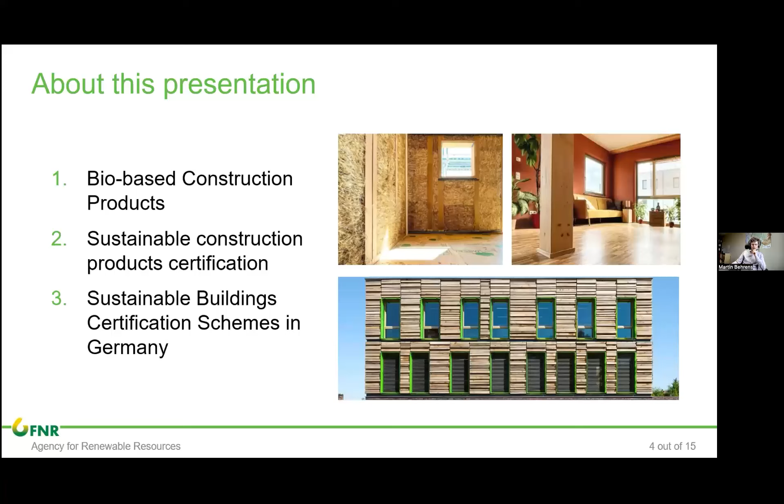Yes, when it comes to insulation materials, there are various issues quite relevant and interesting. One is circularity. Insulation materials made from renewable raw materials can often be recycled. They can be reused as new insulation materials, as raw materials for other products, and in the final step, as a raw material for pollutant-free energy generation. So actually there are no waste residues. And that's, of course, a big difference when you compare it with mineral wool, one quite common insulation material, which is still almost entirely disposed in landfills. And polystyrene is also not a good example when it comes to circularity.

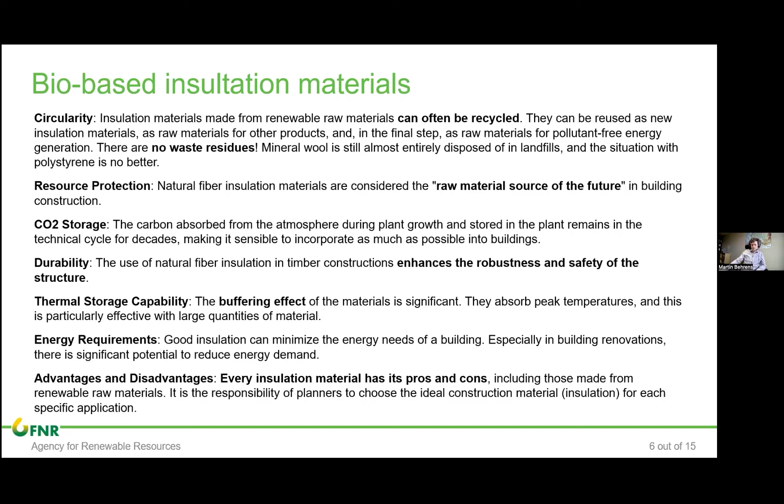Okay, just a quick overview on other materials in insulation: flax, hemp, wood fiber, sheep wool, cellulose. So there are all kinds of options. Some are more common, some are less common. And again, some advertisement to have a look at this brochure we published to learn more about this.

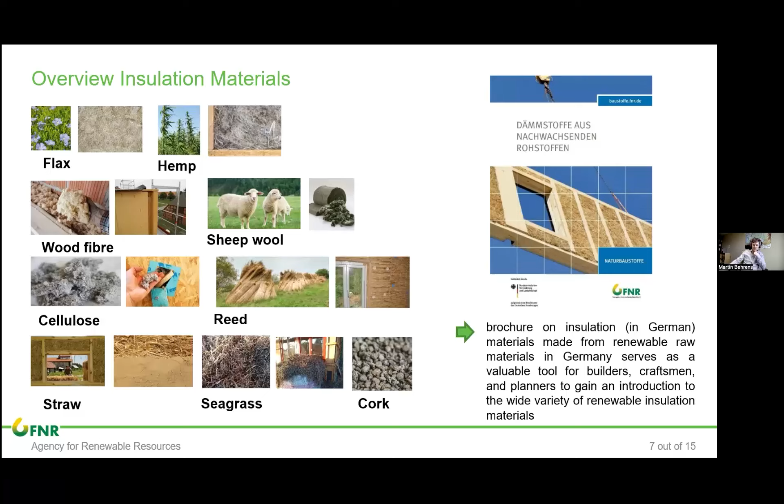Now let's look into other construction products, and I'm trying to be quick here. So we have, of course, similar issues like with the insulation materials. The thermal behavior is quite interesting, the moisture behavior. Toxic load is and can be an issue because you sometimes have very nice nature-based, bio-based materials which are then somehow mixed or "enhanced", see my hands and air quote, with toxic materials. So it's good to examine what's in your product, and even if it is bio-based, it can be harmful because some other substances are used.

The same is an issue with odor. And of course, all materials used indoors should either have a pleasant smell, and that can of course differ from person to person, or should be odor neutral.

When it comes to fire behavior, that's quite an important point and often stressed, and there are a lot of questions about this in the construction sector. The main key message is that natural building materials are often basically more predictable when it comes to fire behavior, because you don't have as many material mixes as you have with other construction products. And so you can predict the behavior in a situation of fire.

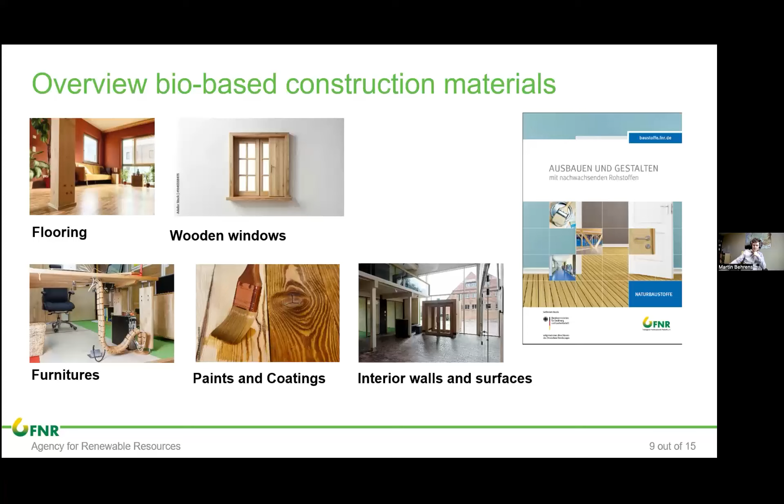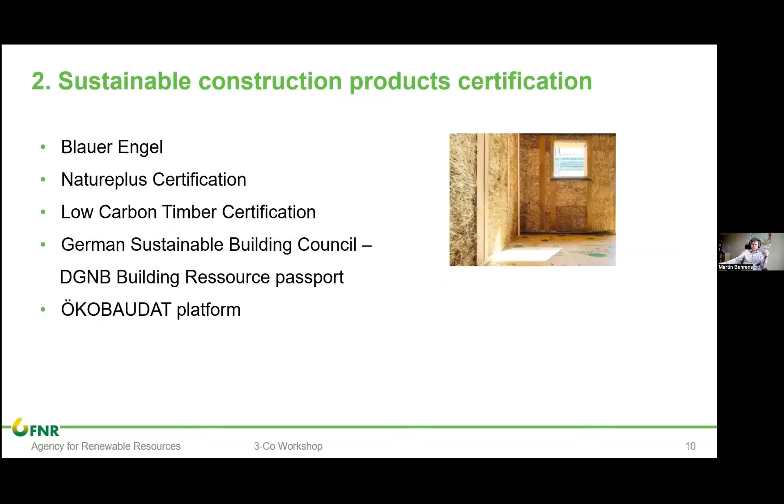Let's have a quick dive into construction product certification. A few examples here are specifically on certain product categories, and then it gets a bit wider, and you see that along the way. So of course, quite famous is the German Blue Angel. It might be small, so maybe something for you to study later.

But there are multiple different areas where you have a sustainability certification here with clear criteria. They can be used in public procurement cases if you are a public buyer. So it's really an interesting area to look into when it comes to product-specific certification.

Second is the Natureplus label, an eco-label, which is not only available in Germany, but also in other parts of Europe. It's recognized by leading certification schemes in Europe and internationally, actually. So it is also used for certification of entire building systems. And Natureplus covers criteria including climate protection, healthy living, and resource conservation. And you always have a link here, so you can dive into the details.

This one is, in Germany, Holz von hier. It's a low carbon timber certification. It is a specific scheme which focuses on the material base, timber, and it is a type 1 label. And the criteria cover the entire transport along the value chain, which is quite important because that's where you have the carbon.

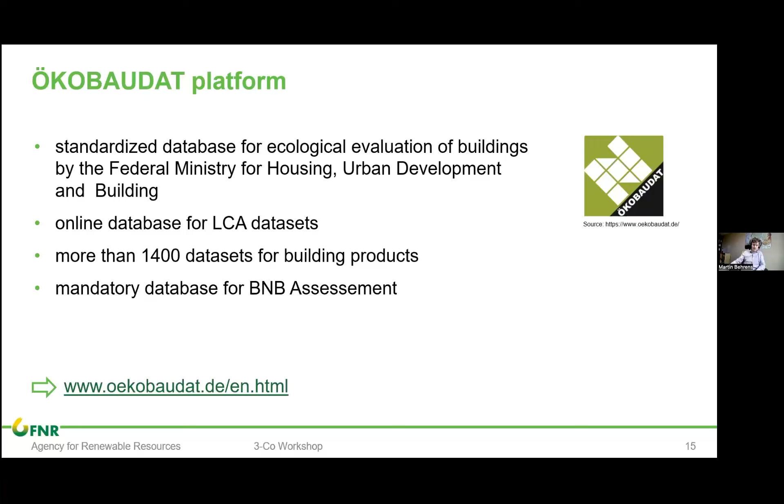All right, now let's have a look into sustainability schemes for entire buildings. So I'm focusing here on the federal support schemes, schemes which are basically backed by the German government. And why do we have that? Because there's an increasing demand for these kinds of buildings, and the need to back this up with a clear certification system backed by clear data and science. So that's what I'm going to show you now.

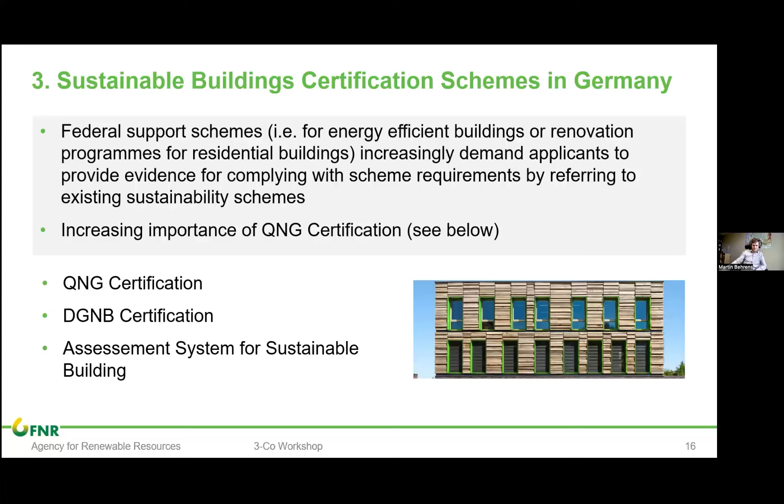So the one certification scheme is again a certification scheme organized by the Federal Ministry of Housing, Urban Development and Building.

And it is basically using existing schemes in Germany, somehow mashing them up and combining them. It's quite new and some of the details are still in discussion. But it is basically providing standards for residential and non-residential buildings, including newly constructed and refurbished buildings. So it also looks into refurbishment, renovation.

The beauty here is that we have a couple of certification institutes available in Germany, and they do the certification along this scheme. So it's quite a nice thing here. This one is a more traditional one. It has been around for quite a while now. It's basically a sustainability certification for buildings and construction products, so it covers both sides. And the criteria look into the environmental, social, and economic criteria, including LCAs and also resource efficient design. So how can we build with less? Quite important.

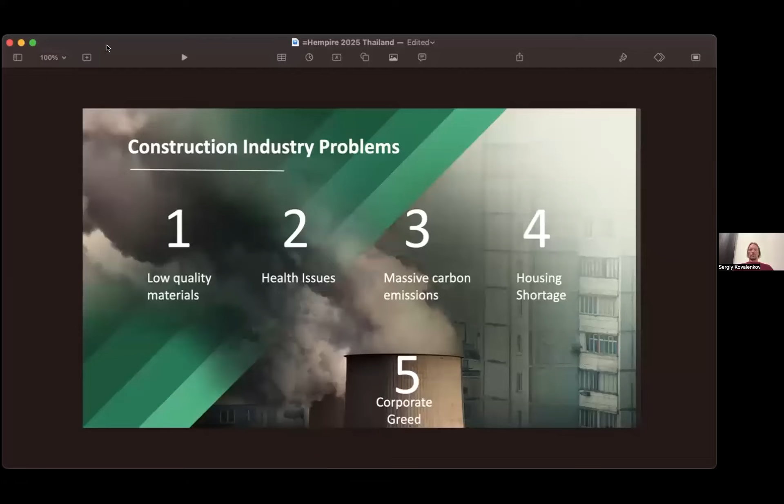And of course, I travel a lot around the world, and I have to tell you that we have a massive housing shortage. And there's a big false agenda on exponential growth. How can we have exponential growth when we have a limited amount of resources on the planet? So obviously we need to use renewable ones, bio-based, and hemp is definitely one of the answers. And Europe has been cultivating hemp hundreds of years ago, and now we're coming back to the realization that we really need these bio-based materials back.

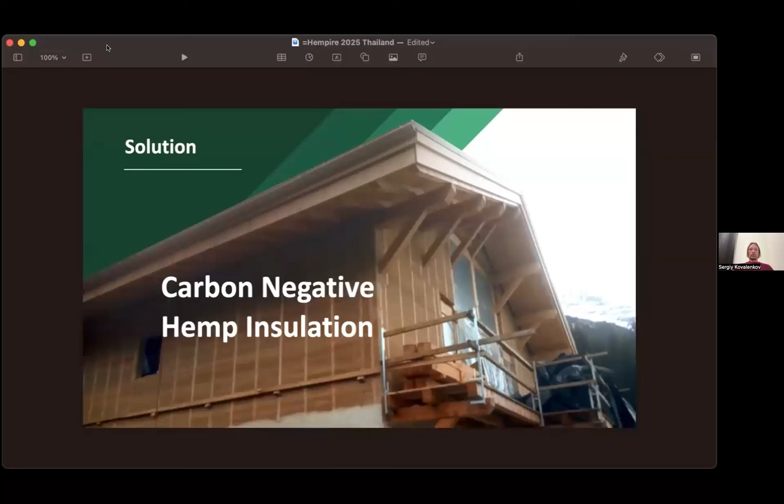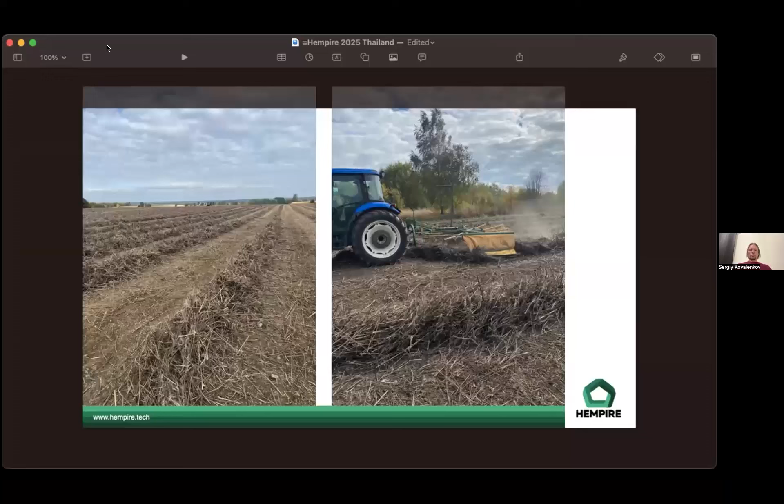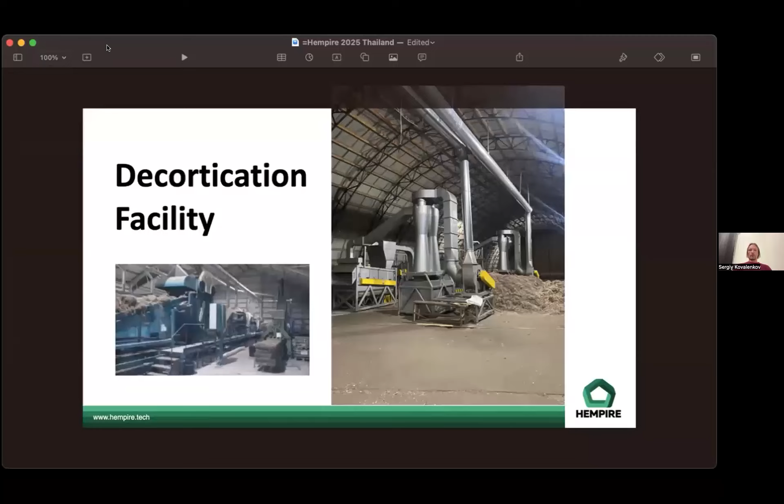And of course, it has nothing to do with the CBD cannabis plant. It's an industrial crop. Here is an image of me standing in Australia about 15 years ago, where we were witnessing how the harvester cuts the crop, which grows literally within 90 days, and puts it down onto the ground. Then they leave it in the field to ret and to dry up. And then later on, this biomass gets baled up and brought into the decortication facility, where the machines are splitting the hurd, the inner core particle of the hemp stem, from the fiber.

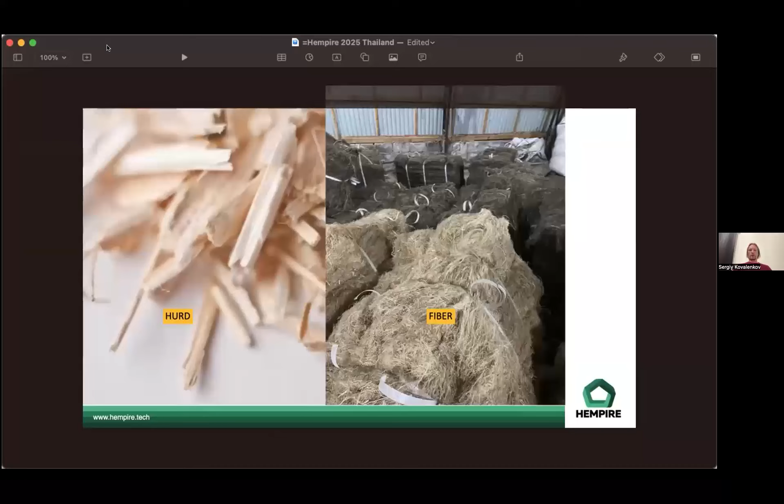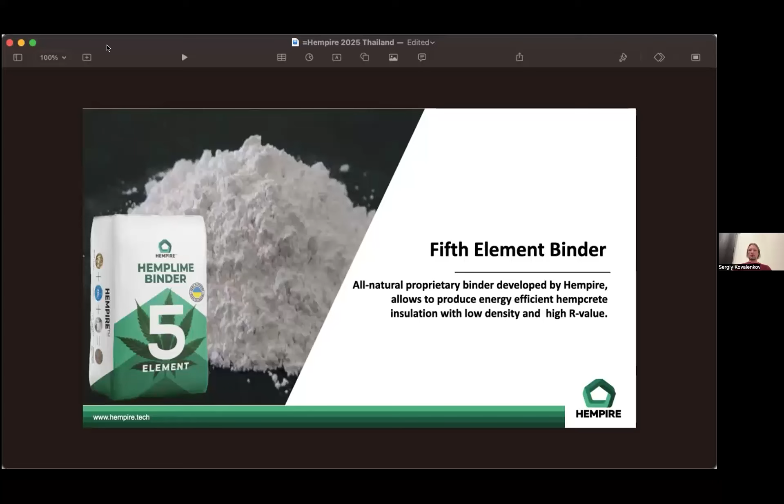So the fiber will go towards the paper industry, textile industry, biocomposite industry, and the inner core particles we are successfully using as insulation. And I'm sure many of you already heard about the product called hempcrete, hemp lime. These little particles basically become an incredible filler because they contain a lot of air, and we're mixing them with a lime-based binder that consists only of natural ingredients, including lime and minerals. It does not include any cement or any toxic components. And we are mixing it with water. So inside the insulation, there are only 3 ingredients.

And what I love about this system is that we can insulate any type of insulation.

We can insulate. Sorry, it's 5 a.m. here.

We can insulate any type of surface inside the home with these 3 ingredients, which is quite remarkable, right? Think about all the products that the construction industry is currently enforcing architects and builders to use, where we can replace them with one single material. It's quite remarkable. And I have to say that the interest towards bio-based materials is rising.

I was one of the founders of the USA Hemp Building Association. We formed this association in 2019, and in the last 5 years, we have been educating ASTM engineers and actually spending our own money and raising the capital to finally get it introduced into the International Residential Code. Now, since January 1st, 2024, officially, hemp lime has been included in the IRC database. So now all the architects from all around the world can come in and review this type of product, which is now on the website of the ICC, International Code Council.

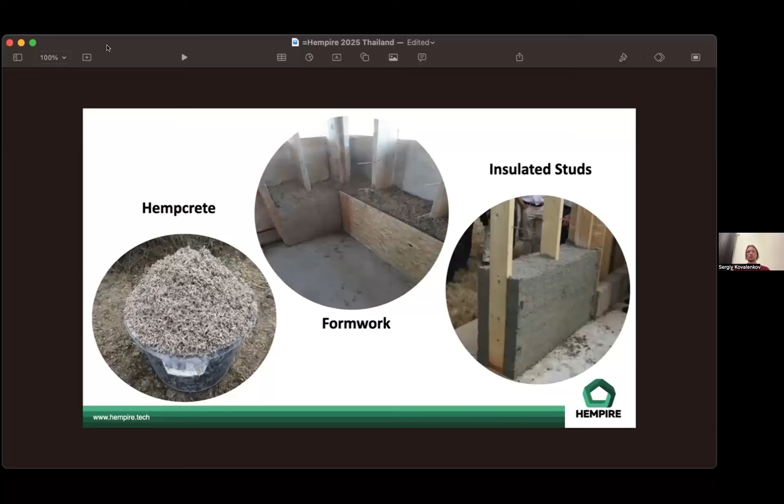And like I've said, I will show you right now many photos of how this material has been used over the years by us on different construction projects. So basically, once you mix up all these components, you have your timber frame or steel frame or concrete frame even, and we can go around and install this material all around your load-bearing elements.

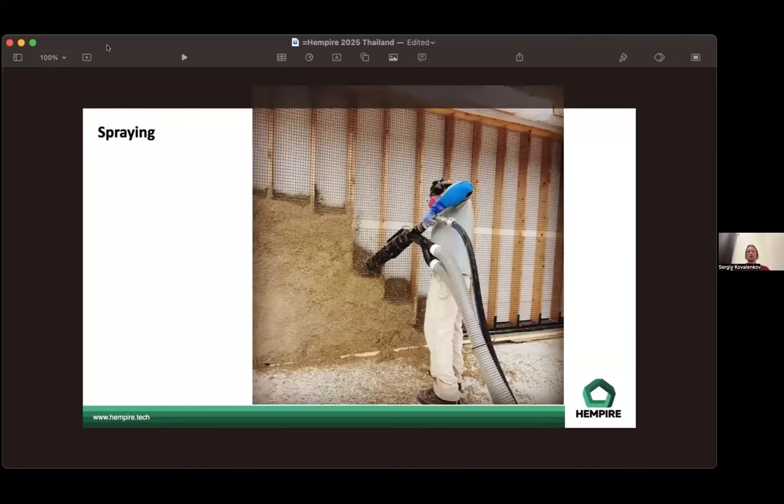So you can spray this material. That's also part of our work in the ICC code. So now it's official that you can spray it against timber frame. There are blocks right now that have been developed by companies, like in France, for example. It's a Biosys block introduced by Vicat, as you can see right here. Then there are non-load bearing blocks that can be included using timber frame elements.

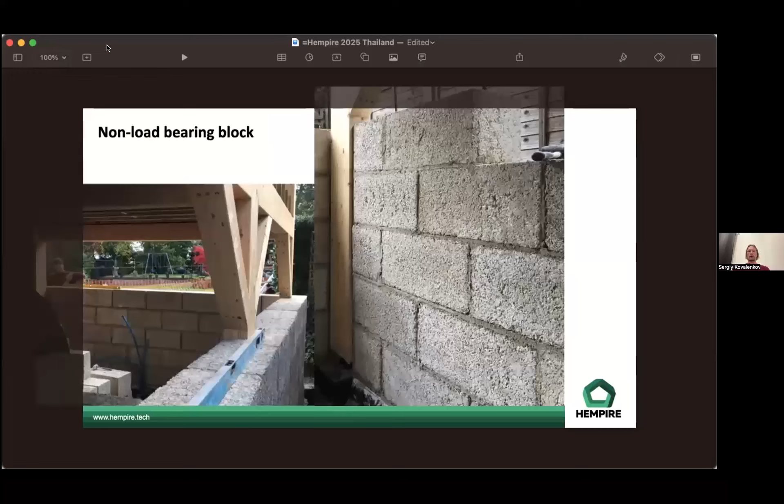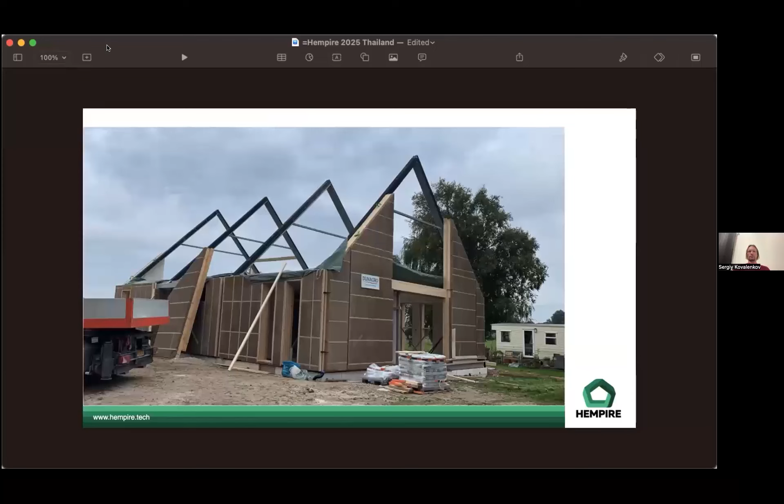Then there are prefabricated panels. This company is called Danagro, good friends of ours located in Holland. So as you can see, there are already companies inside the European Union that have been actively using bio-based materials in order to create incredibly energy efficient housing.

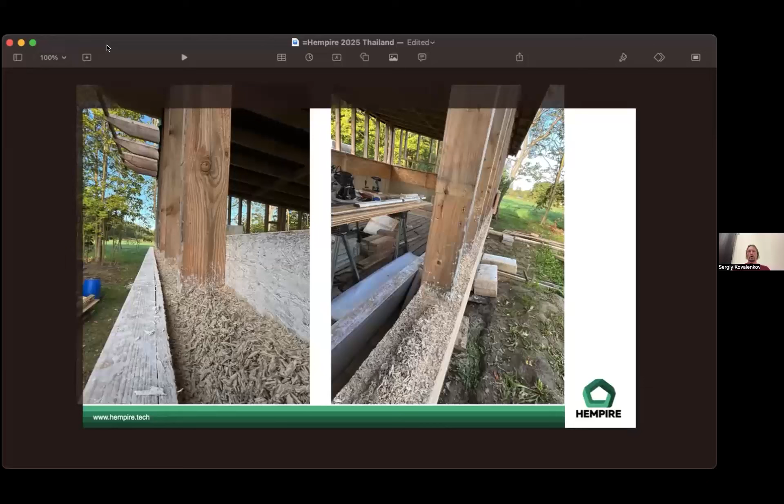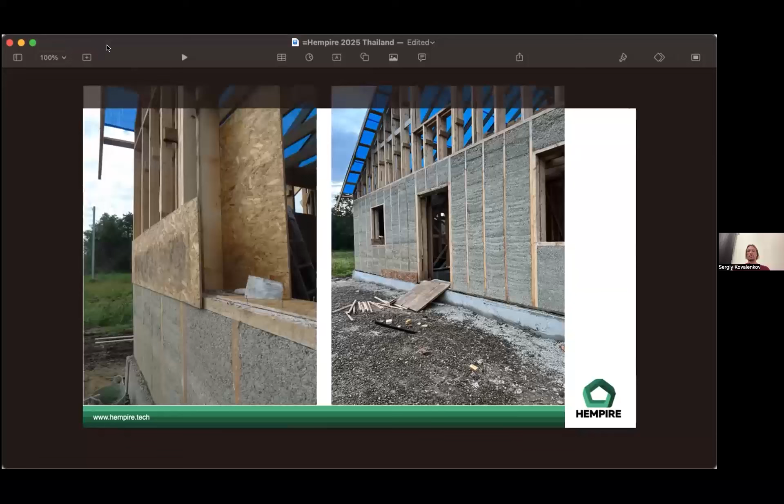One of my favorite systems that we would like to use is, of course, the on-site casting. As you can see, with on-site casting, you can have your load-bearing elements completely or partially covered by the biomass. That, by the way, once we install, is cured by absorbing carbon dioxide from the atmosphere, and it turns into a light stone, which is 8 to 9 times lighter than concrete.

As you can see, here is an example of a timber frame. Here we run the electrical cabling and all the plumbing right through the timber frame. We install the formwork. We compact it in layers 10 to 15 centimeters at a time. And as we get to the top of the formwork here, you can see that the timber frame is completely surrounded by this mortar. So that means there is no thermal bridging.

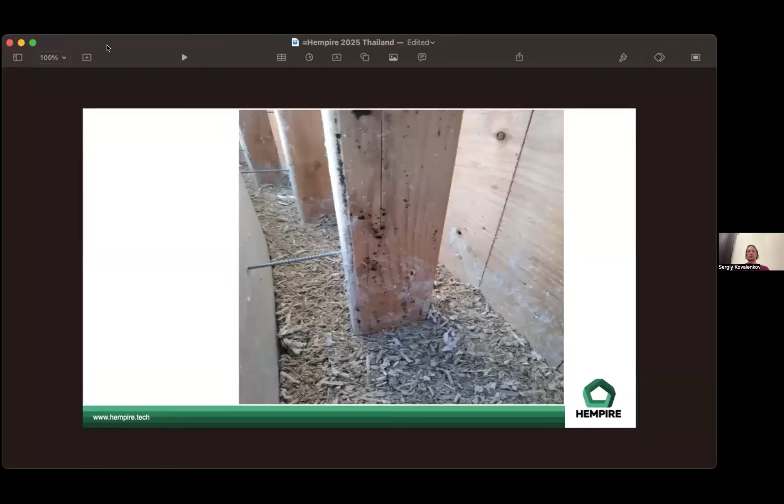And once we get to the top of the formwork, you can remove the formwork instantly and let the material cure and absorb carbon dioxide. So practically it's a carbon negative material, especially if you're sourcing your biomass locally.

So when we founded Hempire and when the formulation was developed, there were two principles that we followed in the very beginning. It was supposed to be 100% natural, the formulation of the binder and the insulation overall, and it had to be 100% Ukrainian, meaning we would have to be independent from importation. Many people were telling me to cut corners in the very beginning, but I said, no, it is very important to source materials locally.

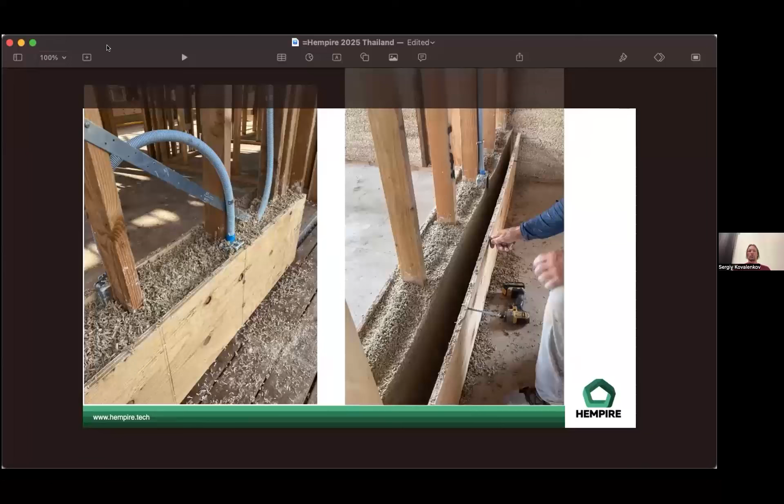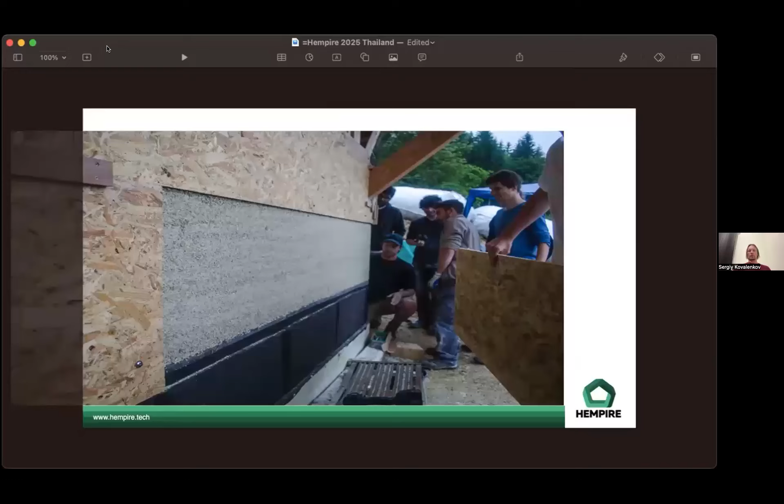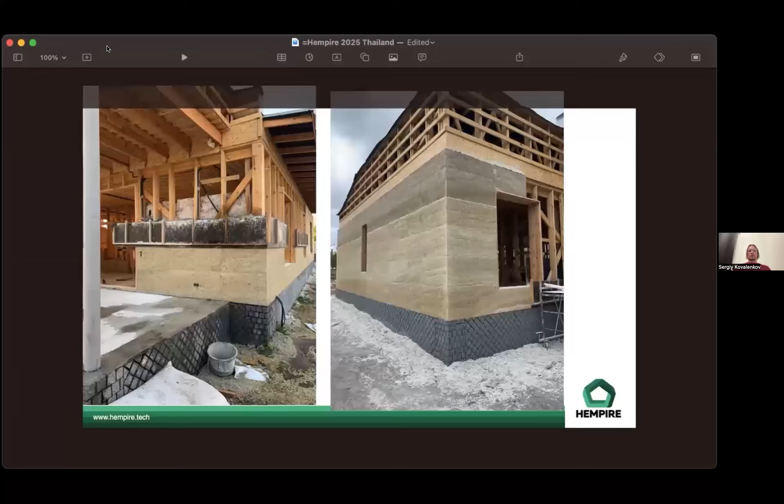And I have to be honest, that is what has helped us to continue our projects during the pandemic and during the war. Right now, as we speak, we continue to build houses using bio-based materials like this one, as you can see. And now people are realizing that logistical costs are going through the roof all around the world. So it is incredibly important to use local materials. Wherever you are, you always have to be sourcing local materials in order to keep it sustainable and, of course, financially feasible for the final client.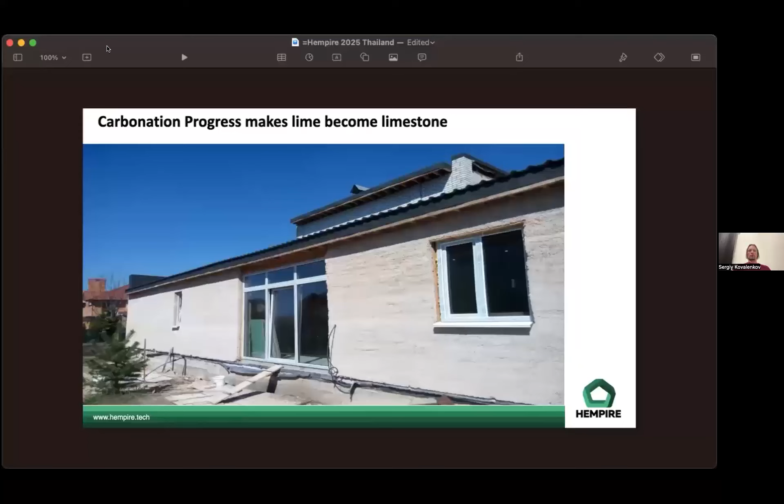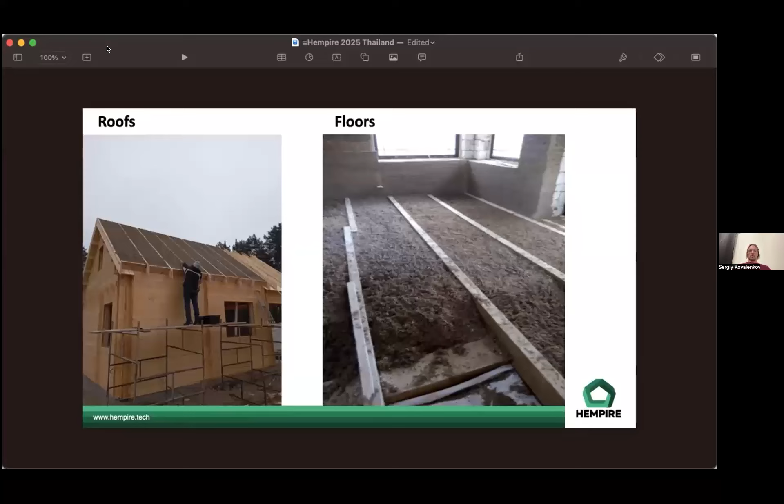So here you can see an example of this project. Once all the formwork is removed, the hemp lime continues to sequester carbon dioxide, and the lime is just turned into limestone. In the end, it's just a bunch of limestone particles including practically wood chips. It's a biomass, right? So no one can tell you that these homes are built using industrial hemp. As you can see, there are examples of roofs and floors. And on the right-hand side, you can see even when we are insulating existing structures with this.

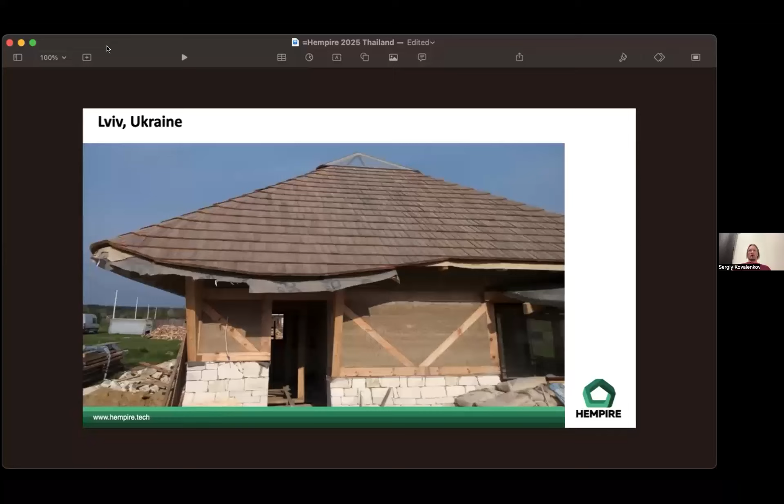So I'm just going to go through a bunch of photos just to show you the capabilities of this technology, which is very powerful. And we've been using it. I'll tell you, I travel all around the world, and the interest is only growing. Where 15 years ago, when I started my path in the bio-based construction industry, no one could care less about it. So it was a very difficult communication with architects, especially where they couldn't find a lot of information in regards to this product.

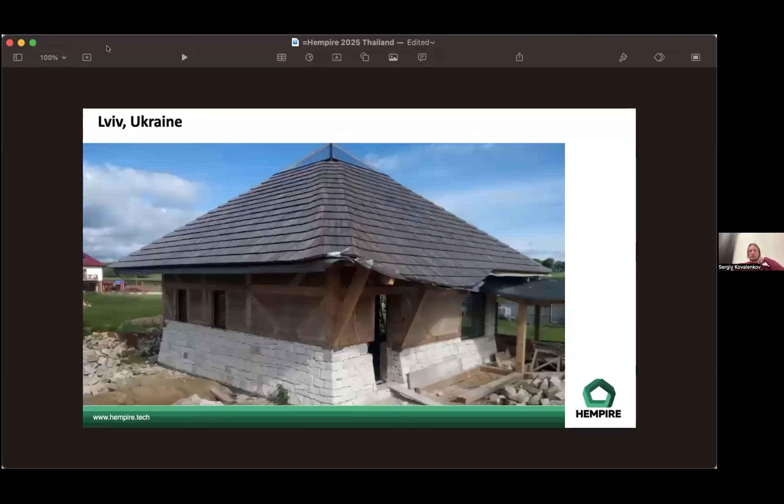But thanks to EIHA, for example, the European Industrial Hemp Association, their conferences, their push towards using bio-based materials, we see the hemp industry rising all around the world, and now we're on a very good path to showcase to people, especially the architects, since they are the ones taking responsibility and including these materials in the design projects. It was a battle 10, 15 years ago. Now things are getting easier.

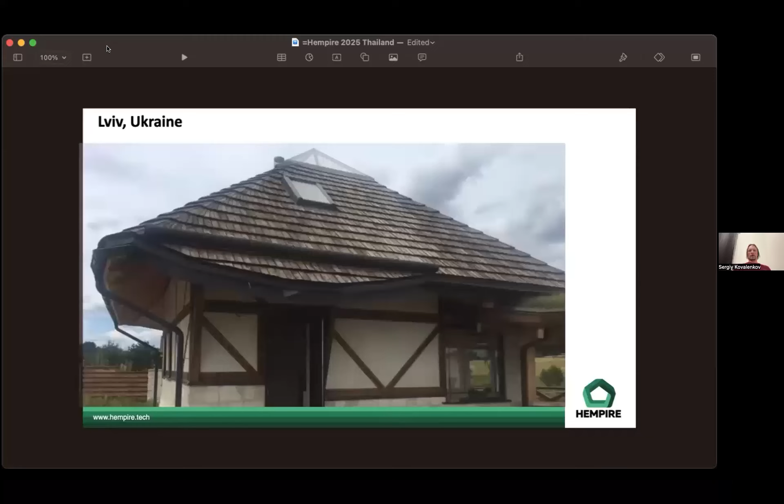But what I do, we go all around the world and we introduce these materials in different countries. As you can see here, this is a very good example where the lime plaster is used on the outside of the building, on the facade and on the interior, meaning that there is zero toxic components. It's 100% natural elements in the wall partition, which is quite powerful, that were locally sourced.

And of course, we're not just talking about mud huts. This technology can be used for modern looking buildings. Sometimes people think that these houses cannot look like a modern house, but no one can tell you that this house has been built using industrial hemp.

So right now, for example, one of the main problems that we have with certifying these products in the European Union: we have to receive a CE marking on all our products, meaning that our production facilities have to comply with all the European Union regulations. Unfortunately, it doesn't go vice versa. It is much easier to register European Union products inside Ukraine, and I believe it takes up to 1 year to go through the entire certification process.

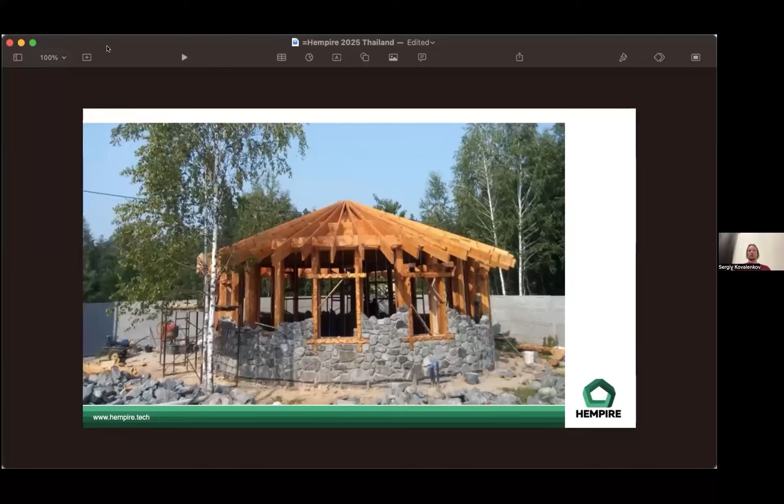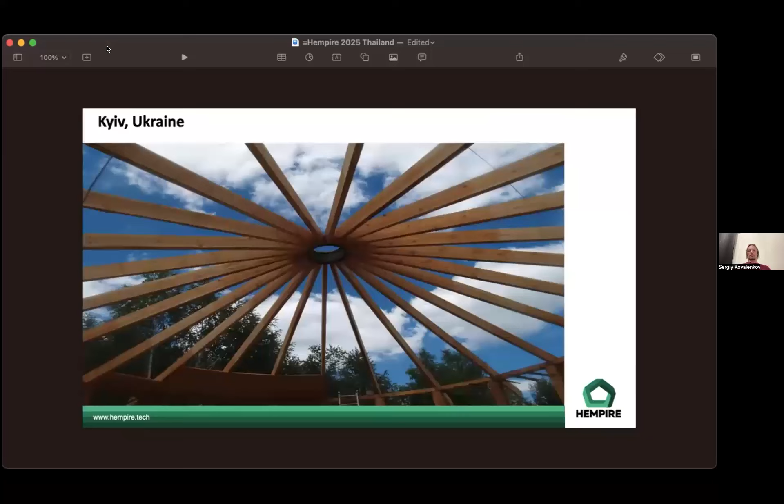If you would be looking to use European Union bio-based materials of similar origin, like hemp lime in particular, with the Ukrainian products it would take about 3 years to get all the testing done and introduce them onto the European Union market. So that's the problem we're currently having, because we're very price competitive in terms of our binder, in terms of our hemp hurds, but unfortunately,

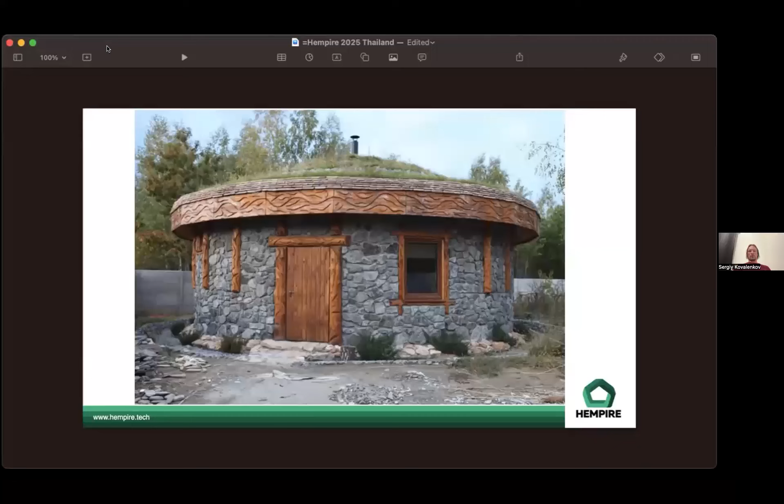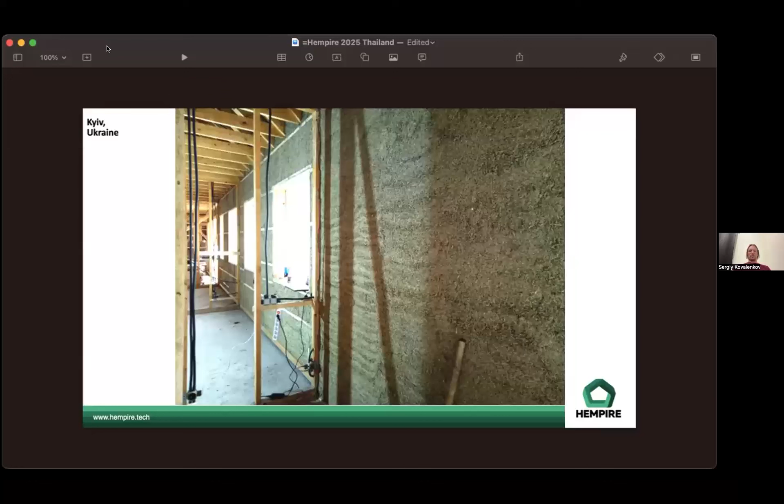these regulations are not letting us introduce our materials, at least to the Eastern European countries, like Hungary, Slovakia, Poland, etc. We don't want to move our product to Portugal and bring it on the truck for 5,000 kilometers. But at the same time, we see that certifying these products and introducing them into the EU is a slow process. Unfortunately. I wish bureaucratic barriers would fall down, and European Union citizens would enjoy the bio-based materials more.

For example, we have a project in Denmark, and it literally takes a year to design it, and it's a small building, a community building, 60 square meters. But the bureaucratic barriers are what's creating all the problems. And I believe the European Union needs to simplify these things.

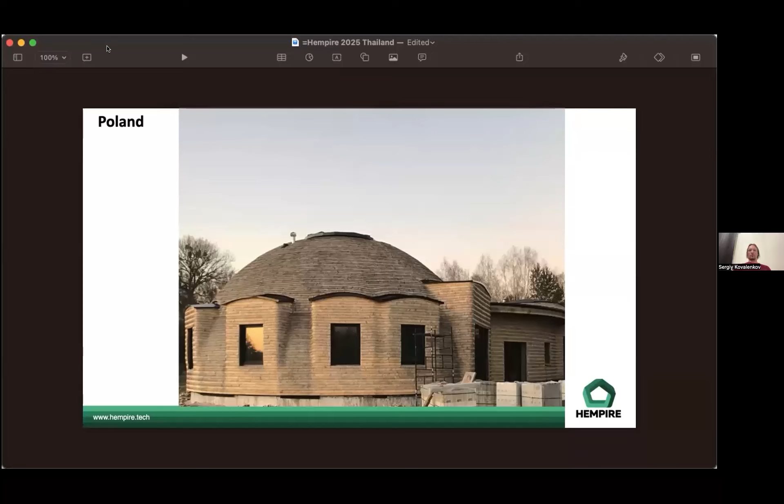So, for example, we have colleagues producing materials in Germany, and they cannot sell them in Belgium, because Belgium, beside the EU building code, has their own code, just like France. And what is the point of the European Union when the products produced inside one European Union country cannot be used in the other country? So those are the issues that should be taken care of immediately, because it's slowing down the progress of bio-based materials in my idea.

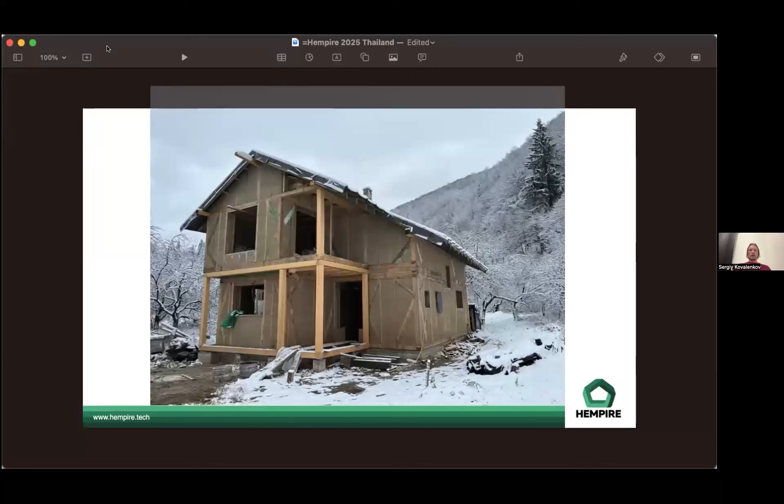Here you can see that we leave this material in the Carpathian Mountains completely exposed to nature. Imagine if it would be basalt insulation or any type of synthetic fiber insulation left like this, exposed for the entire winter somewhere in a humid, cold climate, it would become practically trash. Here we're just showcasing that the outside walls, the inner partitions, and interstitial space are all insulated with one product. Here you see, of course, the examples of domes, more challenging ones.

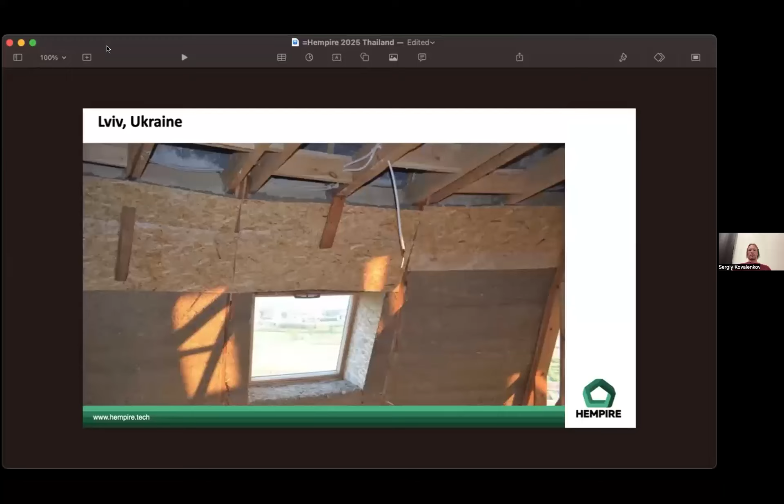Another very important aspect, we need to understand that we are building homes for people. I understand that regulation and certification is very important, but in the end, it's the people that live inside these dwellings. So we have to make them as comfortable and cozy as possible, energy efficient as possible, but at the same time, we're not forgetting about the environmental aspect. For the last century, no one cared about the environmental aspect of the construction industry, and the health aspect. It's a taboo topic, totally.

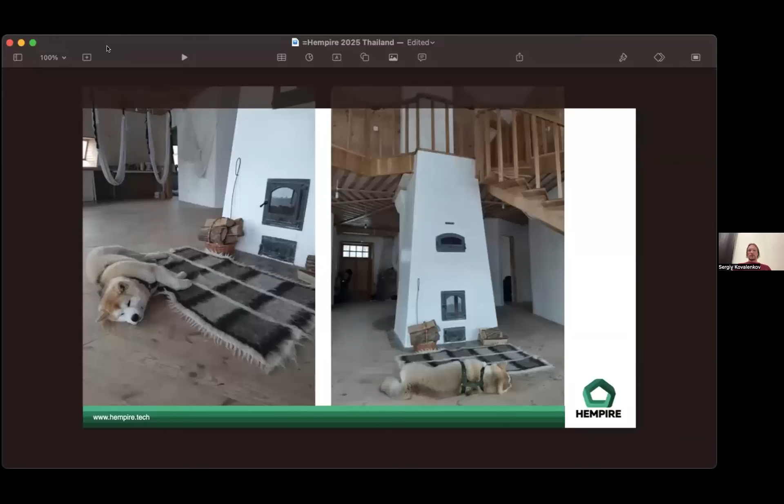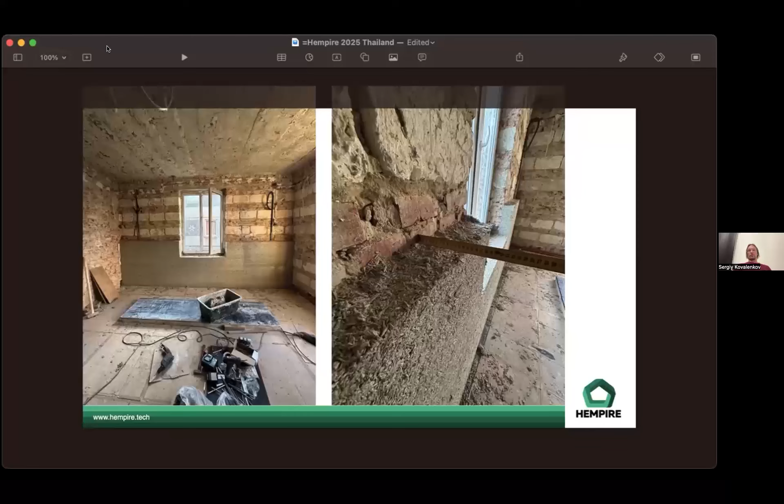But I speak all around the world, from Japan to Hawaii, and I tell you that the health issues that people have living in houses built out of toxic materials is a big issue that no one's raising, and it's a big problem. Here you can see the internal insulation. These are images taken in Ukraine, during the war. So we're turning an extremely ugly building into an incredibly energy efficient one, just by introducing these materials from inside.

I'm going to be cutting it short soon, but just to show you, for example, our colleagues in Poland are cultivating industrial hemp for food grade products, and we organized a workshop. They purchased a hemp processing line, and we're using hemp grown in this field, processed and installed in this house. How incredible is this? Think about it. Think about the carbon footprint of this house. All the hemp that was grown there, we have processed and used in this beautiful dwelling.

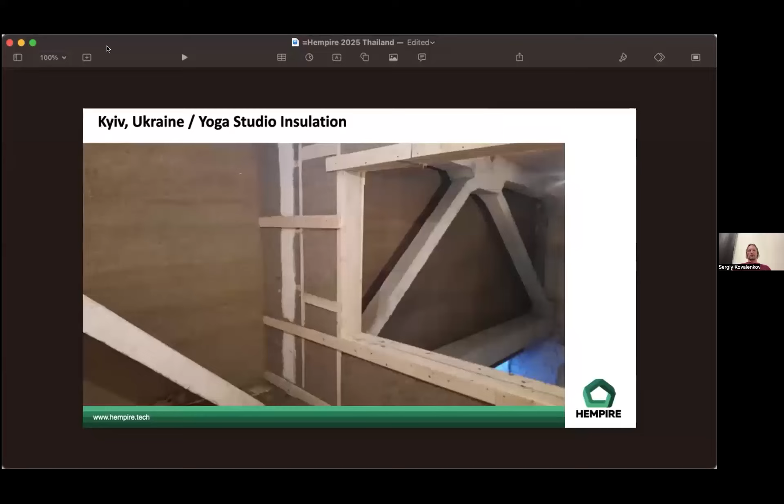I just don't want to take up any of your time anymore. Obviously there are plasters. This is an old Soviet industrial concrete building where we turned it into the yoga studio by insulating the concrete walls when it was minus 15 degrees Celsius, at least at night. It was a frosty wall, unheated space, and now we have put hemp insulation all around just to make it an incredibly cozy yoga space.

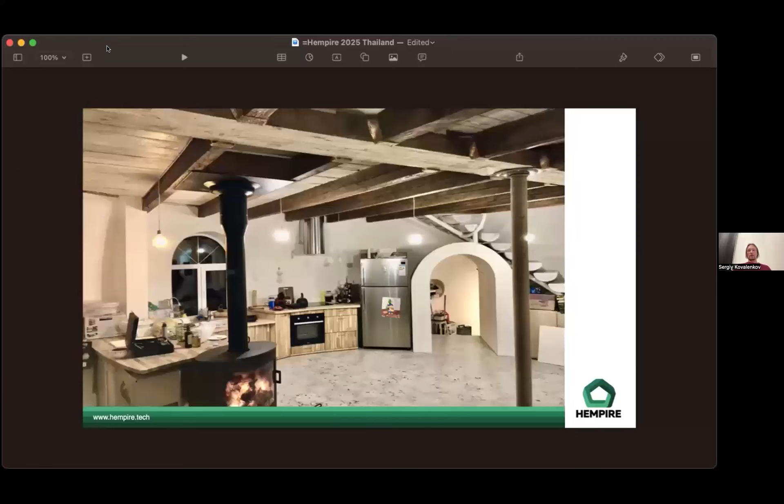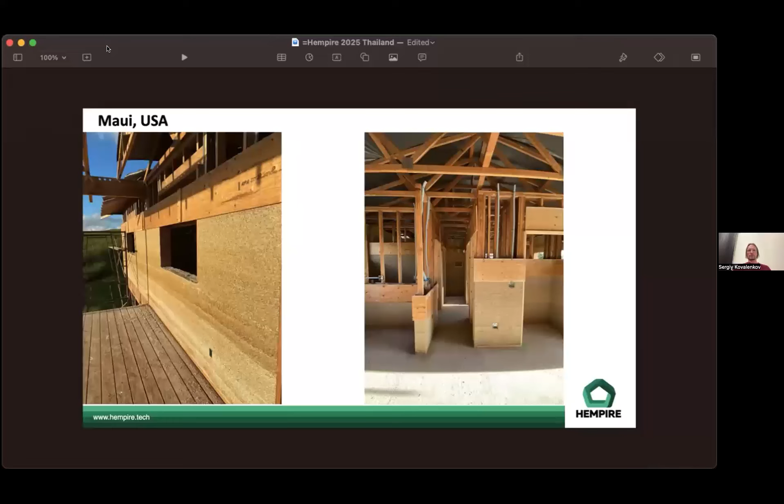Just wanted to show you the stargazing center for you to admire. This is very, very interesting. By the way, these are all real houses. People live inside them, and they're incredibly grateful for what we have here. This is a Maui house. As you can see, we can build up all the internal partitions inside the homes using one single material, which is quite remarkable. Here is the stargazing center I want to show you.

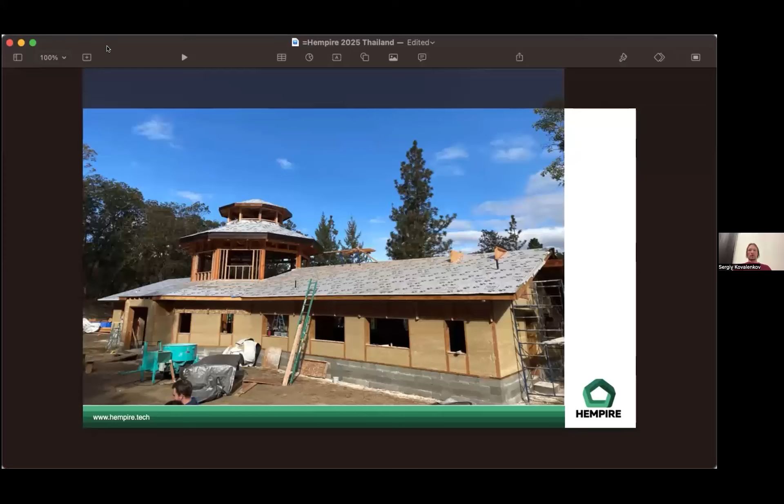This is a homeopathic center in Oregon, where we organized back-to-back workshops, and we have used local manpower, saving $30,000 to $40,000 to the client just by inviting people over to learn how to build with hemp-based materials, which is an incredible story. And this is the foundation. You can see these are woodcrete blocks, meaning mineralized wood chips mixed with cement, reducing the cement content in the foundation by 30%, and using hemp lime insulation material.

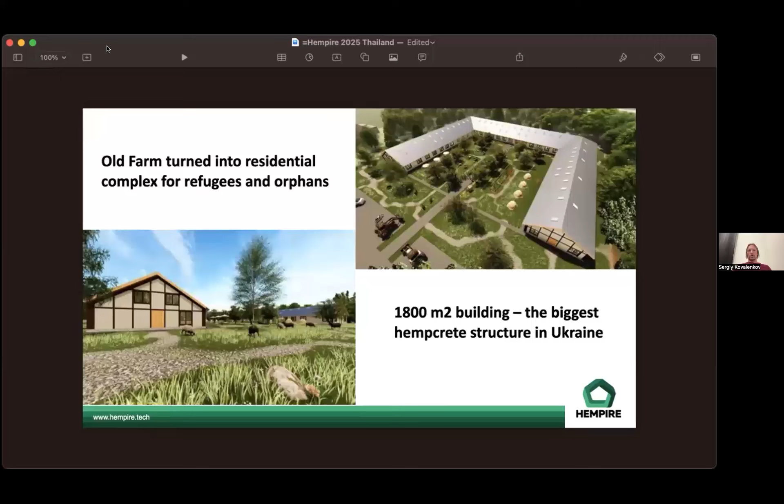This is an old farm that we're turning into a residential complex during the war. Basically, we organized a workshop in the western part of Ukraine, and we were teaching the internally displaced people, or you can call them refugees in Ukraine. Unfortunately, that's how we have to call them. This is the largest residential complex built out of hemp in modern Ukraine so far. We're raising funds for this project as well.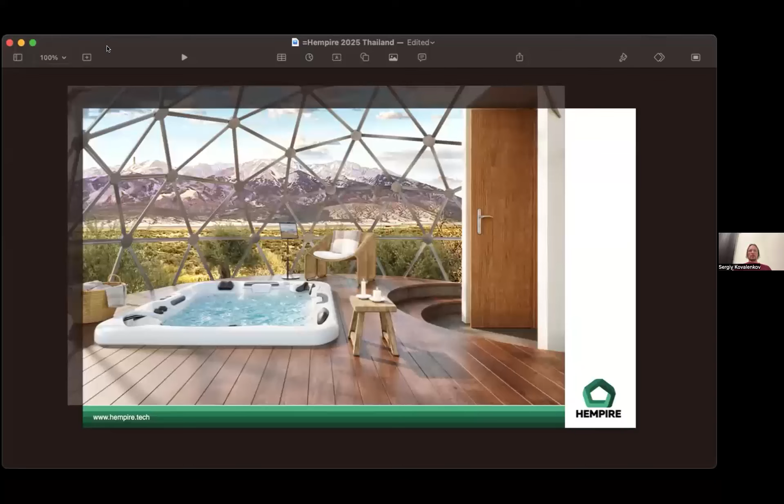So this is the stargazing center I told you about. We're building it in the middle of Colorado. There's going to be villas, and in each villa there will be telescopes. We're using local bio-based hemp materials to build this resort. As you can see, the first villas are coming up. And yeah, I want to talk about the advantages.

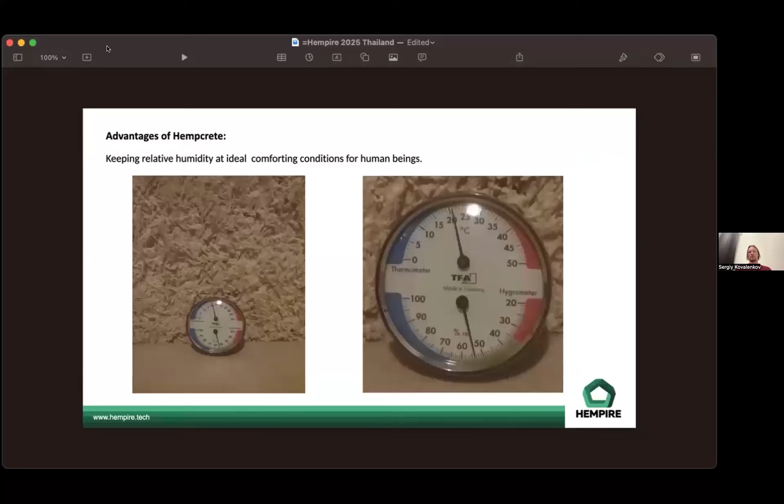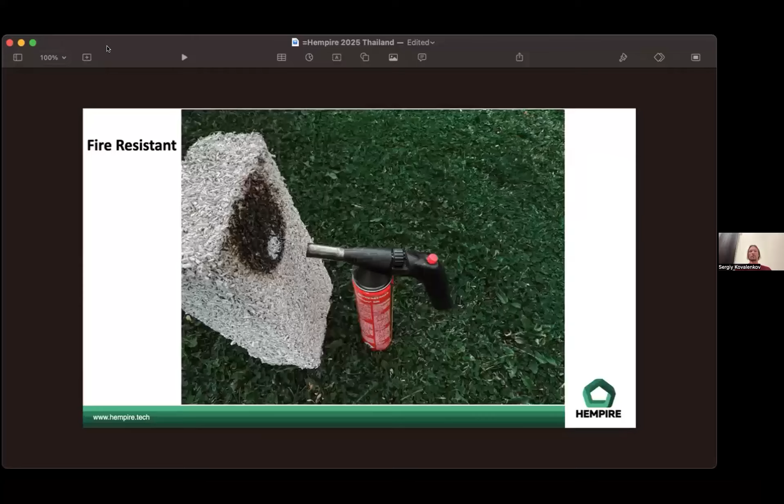Just to finalize, we need to find ways to simplify certification of bio-based materials because, as you can see, we're teaching children how to do it because we're running out of time. And if the governments talk about the carbon agenda, the environmental aspects of our lifestyle, that we need to reduce consumption, that we need to be very conscious about how we consume things, then of course materials like this are pest resistant and mold resistant. We have projects in Thailand and Indonesia, Bali, where mold is a big issue. I know mold is a big issue in European countries as well during winter when it gets very humid and cold. And this material has shown us that we need to use it more often.

I can continue for 5 hours talking about this material because I'm a civil engineer, but simplifying things, I'll tell you one last very interesting aspect of it all. You have to understand that the entire certification procedure and the whole testing system is designed around synthetic-based materials. Bio-based materials act differently, they work differently. So there have to be standards created to test products equally, so you're comparing apples to apples, not apples to oranges.

This material is an incredibly durable material, and it's a fire-resistant material. And of course, a different system of testing and certifying it has to be introduced inside the European Union in order to move quickly, because the sky is the limit here. As I showed you in the example in Poland, we used biomass grown and harvested in the field next door, processed in a facility located a few hundred meters away, and you're basically stuffing it into the walls and roofs of the building next door. It's a very powerful model.

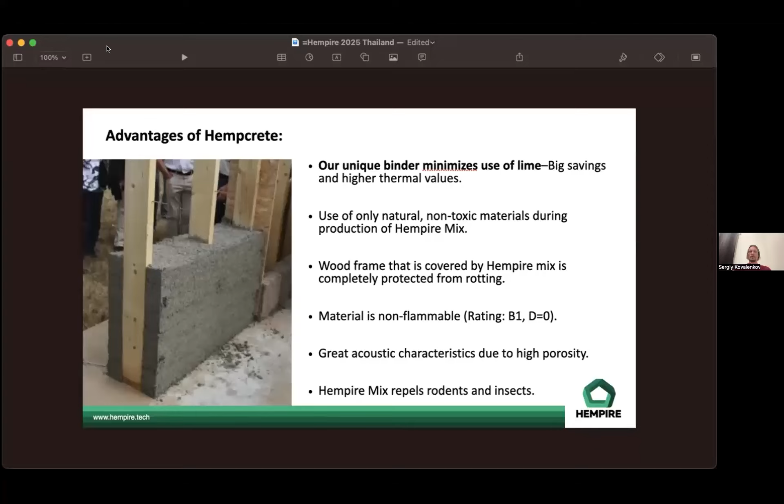So thank you so much for this great overview and showing all these very impressive houses. I mean, making houses just from hemp is just a fantastic idea. So good luck with your ongoing projects.

Thank you so much. So next speaker is Hein van Tuijl. He's from EPEA Benelux. I will start introducing EPEA before I start introducing Hein. EPEA is a pioneer in developing and applying materials passports and digital product passports in practice. Hein is the managing director of EPEA Benelux, and in this function, he coordinated the European Buildings as Material Banks project that laid the foundation for a European cross-sectoral standard for circularity data. A current ISO standard for the data structure was just launched. Within their cradle-to-cradle projects, EPEA applies passport solutions for buildings as well as products. So the floor is yours.

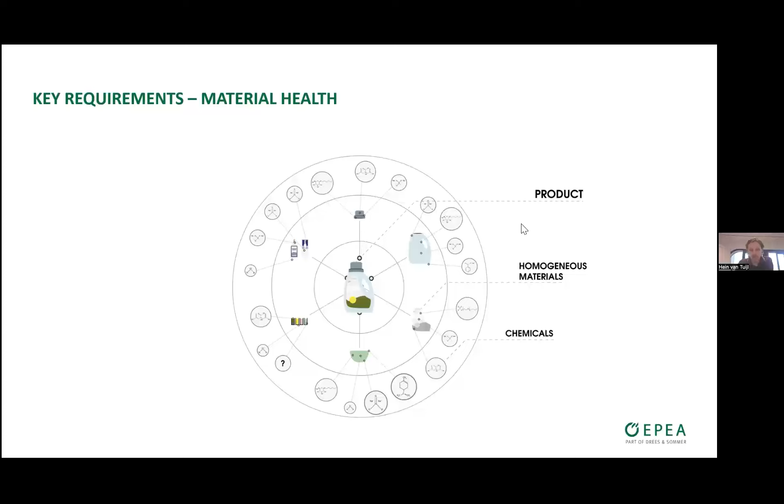So first we look at the individual homogeneous materials, and then we look at the level of the chemicals, which is basically the domain of the tier 2, 3, or farther back supply chain partners. And the reason why we start there is because we want to make sure that materials entering the circular economy are actually safe for people and for the environment and can be managed proactively through their respective cycles in the circular economy.

The methodology we use for that evaluation is the ABCX assessment, which is qualitative in nature, meaning that an aluminium in a building facade could be evaluated as positive because the impact on human and environmental health is okay. The material can be recovered and be recycled at very high levels of quality. And so in this use case, the material could get a positive rating.

In another scenario where we would find an aluminium, for instance, in a cosmetics product, we have to assume that the aluminium can actually enter the human body, where it is a known neurotoxin, and there the same material might get a negative rating under this assessment methodology. So it's not a generalistic approach. It's very specific to the exposure scenarios and the use case that the manufacturer has in mind for the products.

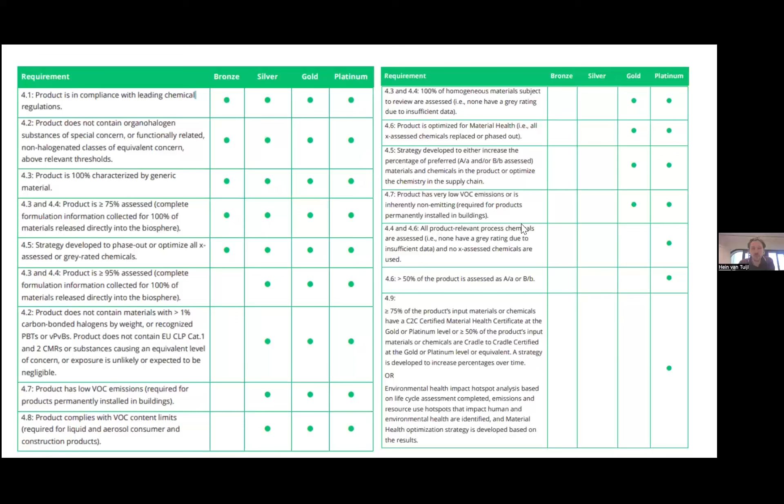And it also allows the product manufacturer to go through a process of continuous improvement, meaning getting rid of all the X-rated chemicals and replacing them with more positively defined chemistry. I basically left this slide in because I know the slides will be shared, but I will not go into it in much detail now. But these are the requirements in a nutshell for you to have a look at later, should you be interested.

The second and final category I wanted to highlight for the certification is product circularity, which intends to evaluate both materials for biological cycles, as were already mentioned in some of the previous presentations, as well as materials that will flow in what we call technical cycles.

The three pillars that carry the product circularity category are circular sourcing. This appeals to all of the materials that are being used and their circular aspects, meaning are they recycled or are they renewably sourced? The second pillar is circular design, meaning how does the product design facilitate circular use or circular recovery of the individual materials? So this is where design for disassembly comes into play.

And the third pillar is circular systems. To what extent is there already an infrastructure for the actual circular use of these materials and products? These are the three color codes I've used for the next slide. So you can see that under the Cradle to Cradle program, there's an incremental improvement requirement.

So at the bronze level, the percentage of materials that are compatible with the intended cycling pathway is 50%, but at platinum level, it is 99% or more. Similarly, for the circular sourcing category, at the bronze level, there needs to be a minimum of cycled and/or renewable content, and at the platinum level, there has to be a technically feasible maximum achieved.

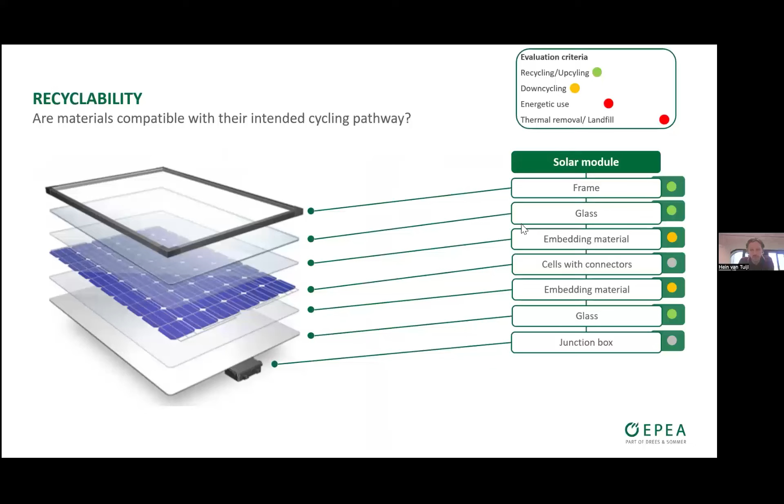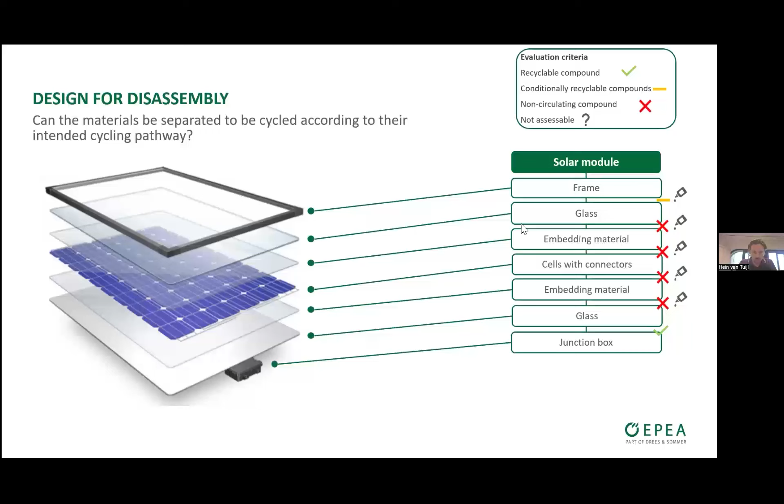But when we look at the final product, we have to notice that actually all of these layers are laminated or glued together, and they're almost impossible to recover into their homogeneous material streams. And so the product design destroys the potential for circular use of the individual materials. So this is the type of challenge we want to address and solve using the program.

The bridge to the next topic is the circularity data report and cycling instructions requirement. If we want to move from a linear economy that does a little bit of recycling to a truly circular economy, then it's absolutely important that information about the circular potential of materials and products travels with the product to the next stakeholder, so that this circular potential can actually be activated. And so the requirement under the Cradle certification standard basically forces all of these industry partners to start sharing this type of data.

And it's an important aspect of the circular economy that EPEA has been working on next to the certification protocol for many years. So in 2010, our group published a scientific study about the necessity for materials passports in achieving a circular economy. The article is still online at the Springer Encyclopedia. It's called Materials Banking and Resource Repletion, the Role of Buildings and Materials Passports. And the way we define these materials passports are sets of data describing defined characteristics of materials and products that give them value for recovery and reuse.

And we started applying these materials passports to light systems, to ships, to building projects, even to city lighting projects. And by doing so, we noticed that in each of these projects, we were getting a lot of good results from sharing circularity data in the stakeholder groups within those projects, but we were doing just slightly different data sets in each of these projects. And we noticed that actually if we want circular economy to take off in the continent of Europe, which is our goal under the European Green Deal, then there needs to be, at least at the European level, a common language to speak in circularity.

And that's when me, together with some colleagues, started a big European research and development project under the Horizon program to start developing this uniform nomenclature, which is applicable to all industries and to all European countries. And this project ran from 2015 to 2019. We developed approximately 500 passports at the product level and tested them on approximately 10 buildings to see, okay, now that the circularity data is available at the product level, does it actually help us to create more circular buildings?

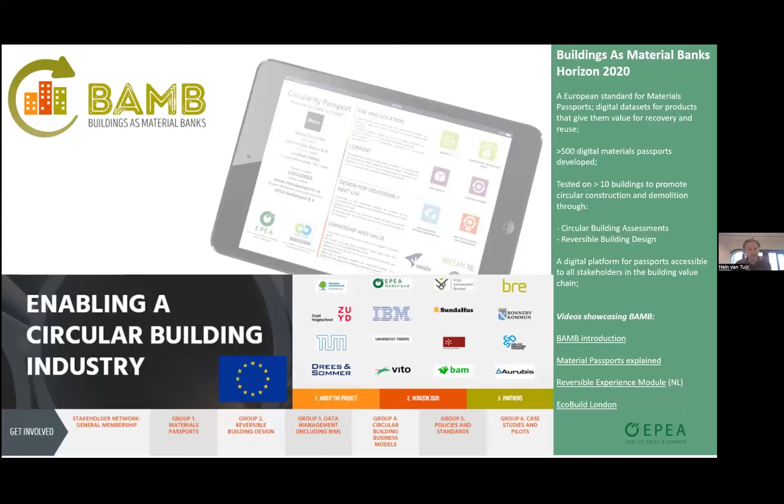And this ISO norm 59040 is part of the first family of ISO norms for the circular economy. There's now 5 in total, and this one in specific is focused on communicating circularity data at the materials and the product level. My invitation to all is to start using it, and also to feel free to approach me or my colleagues to help you understand how it works and to apply it.

Excuse me, I need to take one step back. The digital product passport, as part of the ESPR, is also in the European Green Deal, meaning that all industries will have to share digital product passports with their products by 2030. We believe that this ISO norm can function as the backbone for that digital product passport. And yes, the digital product passport can have additional information that is relevant, specific for instance to textiles, or batteries, or consumer goods, or construction goods. But it's of crucial importance that the basis of all these data sets is one standardized format in one common language.

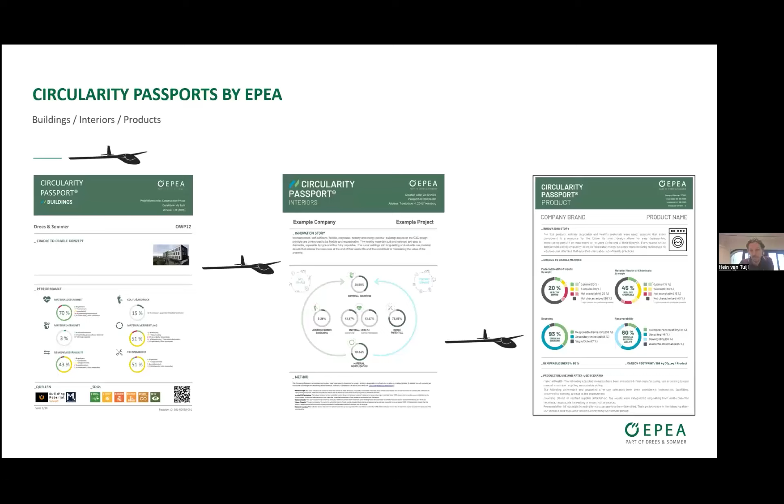One of our most recent big projects that was opened last year is the World Trade Center in Brussels. Our role was twofold. With our real estate consulting branch, we helped the owner of the building to meet the very high level cradle-to-cradle requirements of the tenant, which was in this case the Flemish government. And with EPEA Industry, we helped the supply chain to communicate circularity data and also to achieve cradle-to-cradle certification for the materials that were being used in the building.

So circularity data at the product level was gathered and then shared into a circularity passport at the building level, which was presented to the building owner and also to the tenant, the Flemish government, who had this as a very explicit requirement for the building.

The building sits in the north part of Brussels. It's called ZIN, and it's the old World Trade Center that used to consist of two separate towers and is now one big building consisting of two towers that are joined together by this center piece that actually stretches all the way to the back to connect with the second tower.

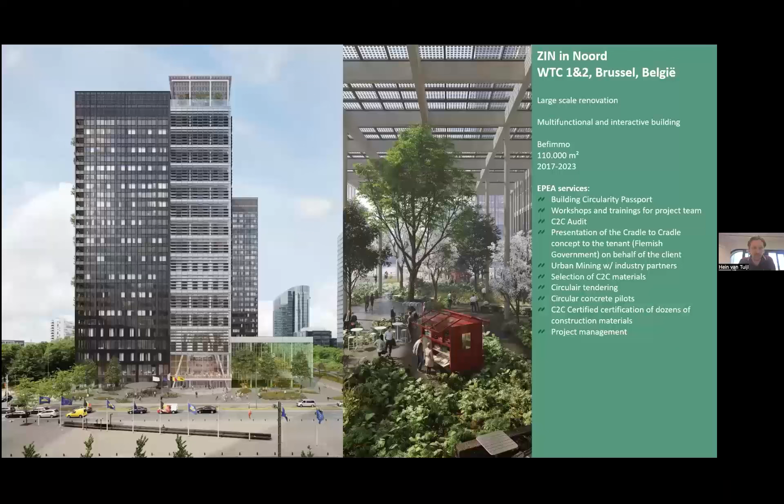So maybe start with my colleague Ferdinand, and he's asking Hein, what similarities and differences between cradle-to-cradle certification and LCA studies are there? Yeah, that's a good question. Actually, the Dutch government asked us the same question about 10 years ago, and we published a paper that explains LCA in the context of cradle to cradle or vice versa, depending on how you look at it.

But what it comes down to is that LCA is primarily a tool that focuses on environmental impacts and provides an incentive to industries to reduce those impacts. And cradle to cradle, in essence, is a framework to integrate positive impacts into buildings, products, and systems. And the way they can support each other is, of course, that LCA is a nice calculation method to see if your optimization and innovation work has resulted in certain environmental gains.

Unfortunately, what we sometimes also see is that under the cradle-to-cradle framework, we want to radically change a certain type of material, product, or building, whereas LCA is a little bit more focused on improving the existing. And so sometimes there's a bit of a conflict in the two approaches.